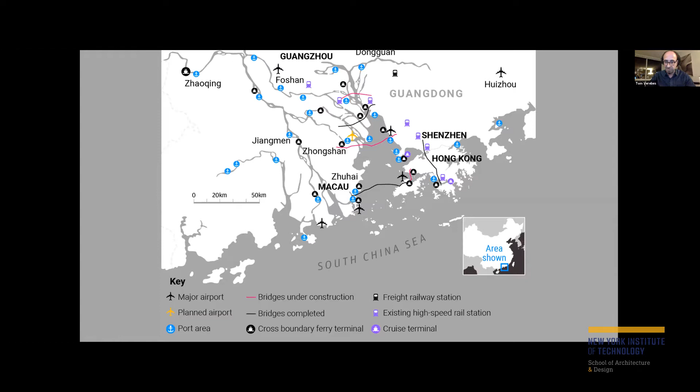Now the Greater Bay Area, it's difficult to put a number on it, but it's somewhere in the region of about 50 million, and all of the province plus Hong Kong and Macau are 120 million or so. The term 'city' is clearly outmoded due to its imprecision to describe these urban entities.

The population figures that you're reading on your screens are truly astronomical. The territories are vast. An important aside in this story is that in the year 1800, 220 years ago, Beijing was the largest city in the world with a population of 1 million.

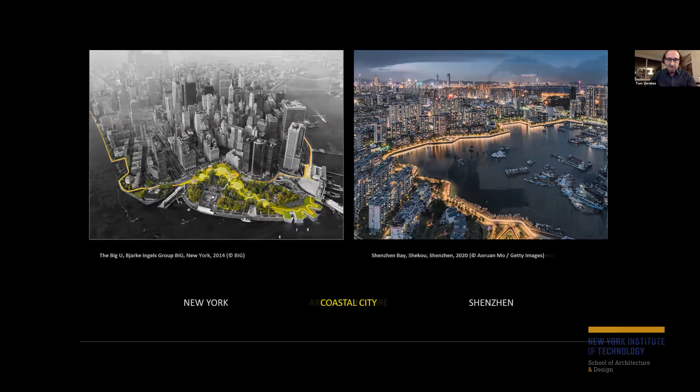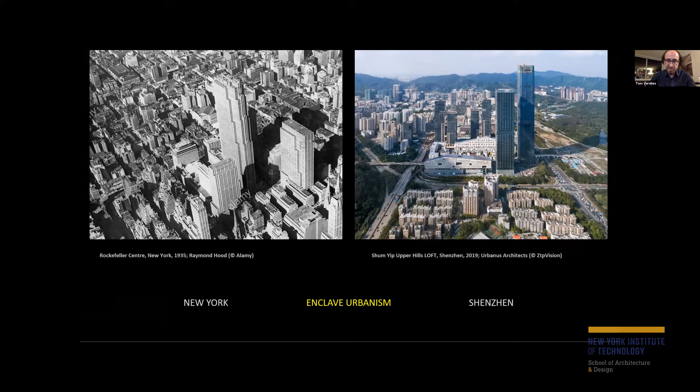So just very briefly, a little bit of the history of my work and practice on southern China, or in southern China.

We did an exhibition project for the Hong Kong Shenzhen Biennale in 2009 titled Parametric Pearl River Delta. We documented sets of urban and architectural information related to 11 cities in Guangdong Province, the 9 cities in the province and 2 others, the 11 cities that comprise now the Greater Bay Area. We coded a back-end computational model to be used in the front end on screen as an interface for visitors to design their own city.

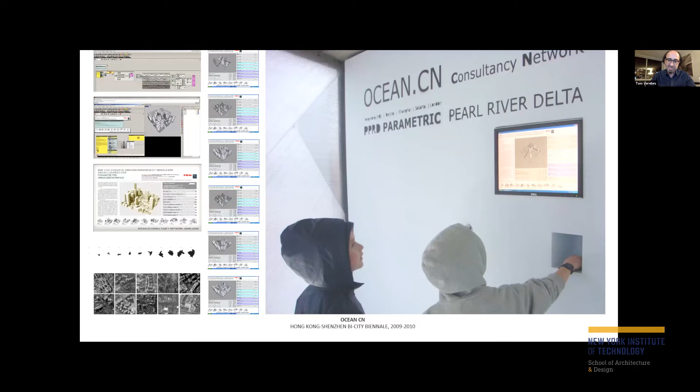That project and this one as well was worked on together with Gao Yan. This was our entry for an international competition for the terminus and passport ID control and customs for the Hong Kong side of the Hong Kong-Macao-Zhuhai Bridge, which the bridge is built, and the winning entry is also built for this landing point.

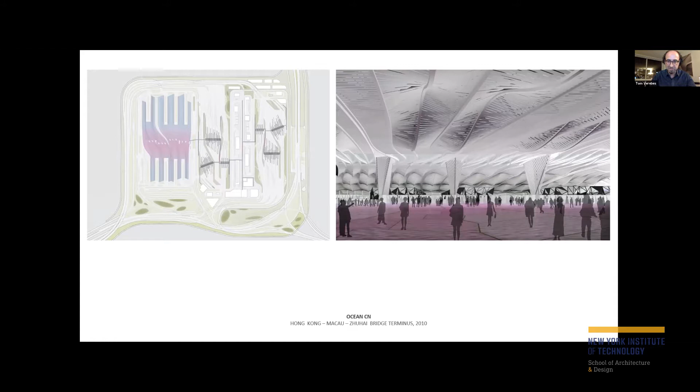In our proposal for the Liantang crossing between Hong Kong and Shenzhen, this is another border crossing, a land border rather than the bridge. We proposed to confront the dichotomous characteristics of the Hong Kong side being a green border and the Shenzhen side being built up as an urban edge. The scheme accommodates the criteria for a two-way flow of 175,000 people per day.

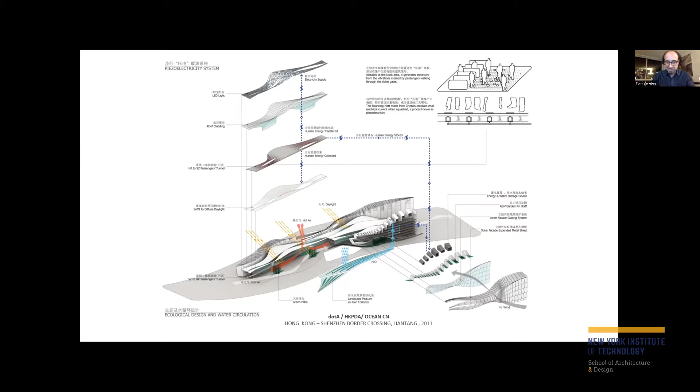A comprehensive energy scheme was developed. Footsteps of the mass of people, of the 175,000 people, would generate electricity. Rainwater collection was put in. Passive temperature control was embedded into the spatial organization and layers of performative materials.

Lastly, Hong Kong was my home for 11 years. The Seoul Biennale had invited my practice to contribute, and we produced a piece of research on Hong Kong using drone photography, video, and photogrammetry scanning. This is a model scanned of the Wah Fu Estate in Pok Fu Lam in Hong Kong. Thanks to our dean's support, it was exhibited also, this project and lots of its documentation in large format printing and video, in the Ed Hall Gallery in our Long Island campus before COVID hit.

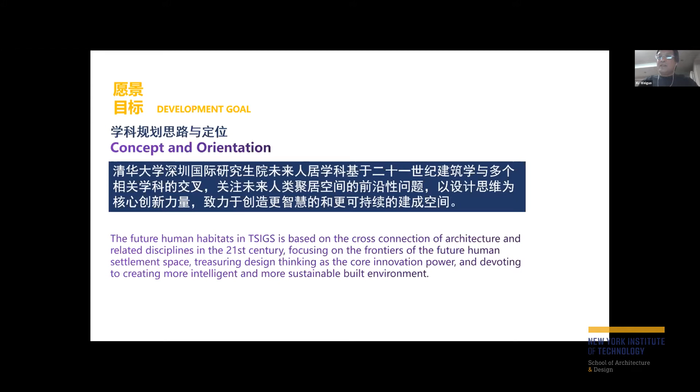Future human habitats in TSIGS will be built as a global think tank in the field, giving full play to Shenzhen's unique advantages of urban development practice, gathering the world's latest design thinking and human living concepts, and creating and propagating the most inspiring knowledge of human habitats.

I could say it has 3 basic characteristics. One of them is multidisciplinary integration and collaboration around the core of design thinking. Second, close integration with the major frontier issues of international and domestic human habitats development. Third, close integration with Shenzhen's representative development practice.

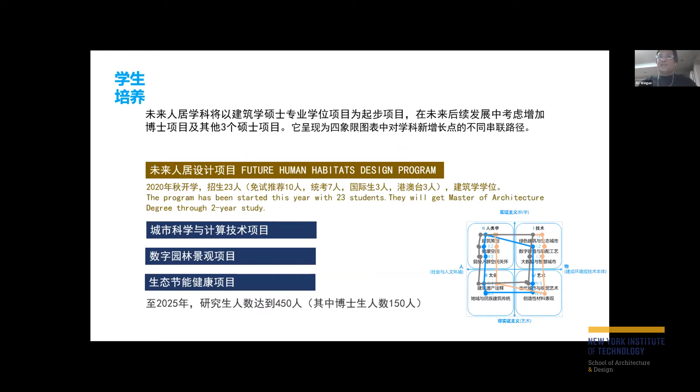The key research direction of the future human habitats discipline will emphasize the characteristics of cutting-edge, technical, future-oriented, multidisciplinary conjunction. There is 1 research center and 3 research areas in the institute.

The research center has been named the Global Innovation Center on Design Thinking for Future Habitats. The 3 research areas include future urban science and supporting technology system, research on digital architecture and intelligent construction, and the innovation center in technological humanities for human habitats.

I myself am in the area of research on digital architecture and intelligent construction. This research direction will be based on the deeper involvement of big data, 3D printing, and AI technology in the urban and architecture area.

The large-scale 3D printing technology of using composite materials such as wood and palm, and economic building materials such as concrete will be studied. And the digital city design, digital building design, and their evaluation methods and technologies will also be investigated based on data analysis, algorithm generation, and computational simulation, starting from the demands of future human habitat. It will also focus on establishment of scalable software and hardware platforms and updating of the corresponding architectural knowledge structure, providing new methods and tools for future urban planners, architects, builders, and managers.

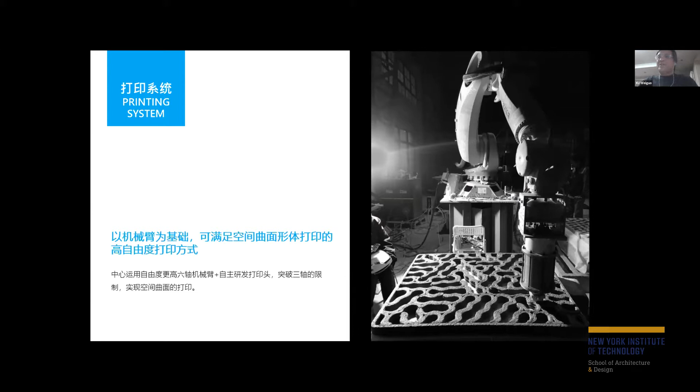First, we developed a printing system based on the robotic arm. Generally the printing system is a truss system, with 3 axes that could go X, Y, Z, but using the robotic arm, it could be printed in space.

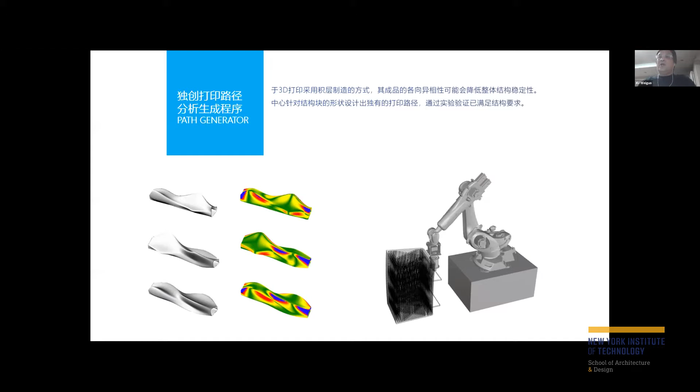Second, we developed a printing head which could continue long-time printing, and also developed printing material, concrete material - the material ratio is very important for the printing. We also developed a printing control system which combined a path generator and the control program of the robotic system.

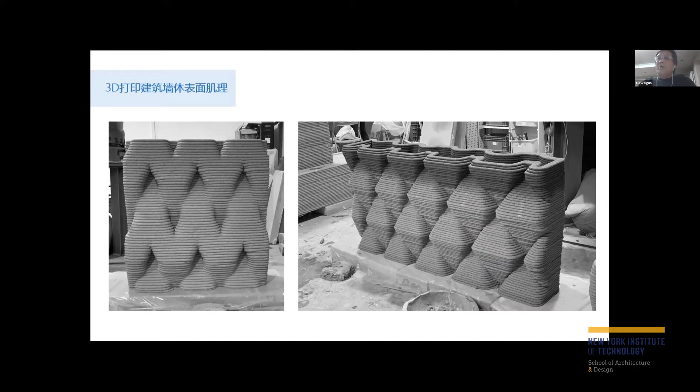After we set up this mechanical system, we did some testing printing. This is a piece of wall printing, and this is a big scale component of building printing. We also did color printing and printing texture of different patterns.

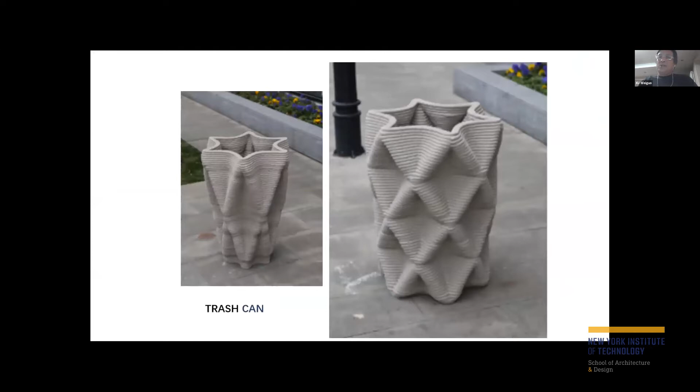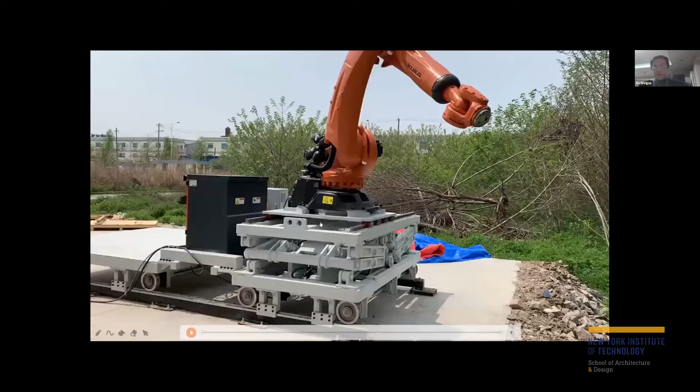In this project, we independently researched and developed 2 systems. One is a movable platform of robotic 3D printing in concrete, and the other is a rapid construction system for a concrete house. Recently, the 2 technology achievements have been successfully applied in the actual printing and construction of a model house for Kenya.

This model house is located in the experimental base of Tsinghua University in Wuxi. The screen shows the first system. Let's watch a short video.

The mobile platform contains a mobile robotic arm with a 3D printing device, a rail with a mobile lift platform, and a gantry suspending platform, among other components. In the 3D printing device, the robotic arm and printing front end are installed and designed to be movable on the lift platform. The printing material, the appending machine, the stirring and pumping all-in-one machine, and the control equipment are installed on the gantry suspending platform.

The printing platform requires only 2 persons operating it, reducing human input in the printing and construction process to a minimum. This printing platform enables direct on-site printing of all bases, walls, and roof, resulting in rapid construction at a low cost.

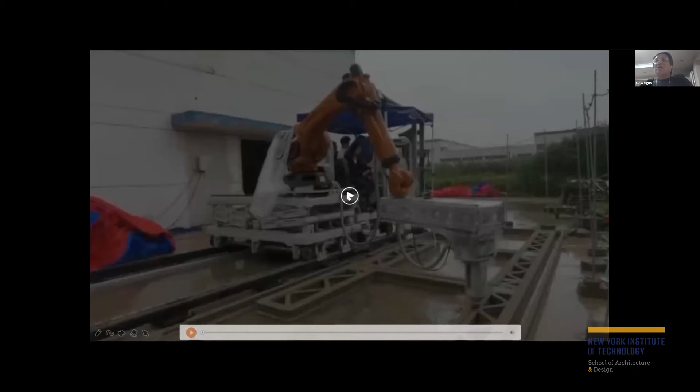After testing this mechanical system, we started printing the house - the model house. Let's see a video. This is the process of construction. The machine, the system, starts to print the base.

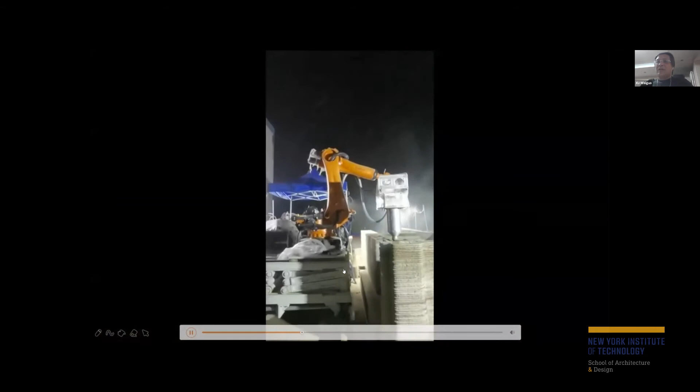The robotic arm, in fact, has 6 axes, and adding the rail and the platform, now it has 10 axes. The lift platform rises and prints the high part of the building.

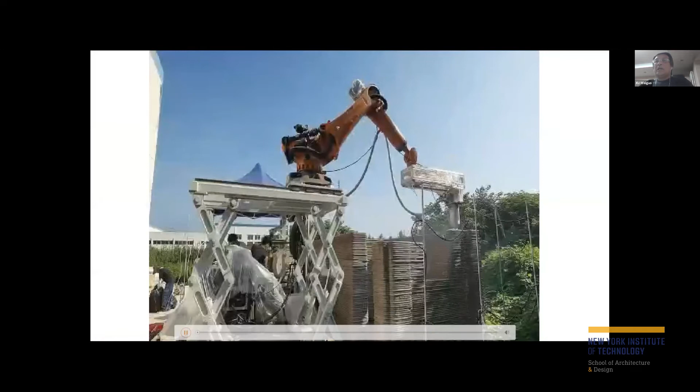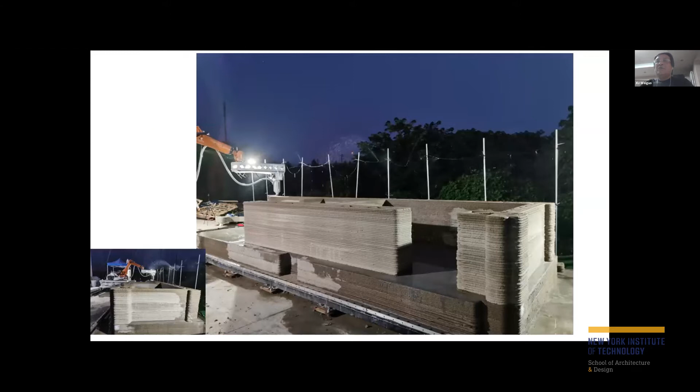Even at night, it could continue to print. This is a photo of night construction.

Another system is a rapid construction system for concrete houses. This is a 40 square meter family house for 2 to 4 people. This is the process of construction.

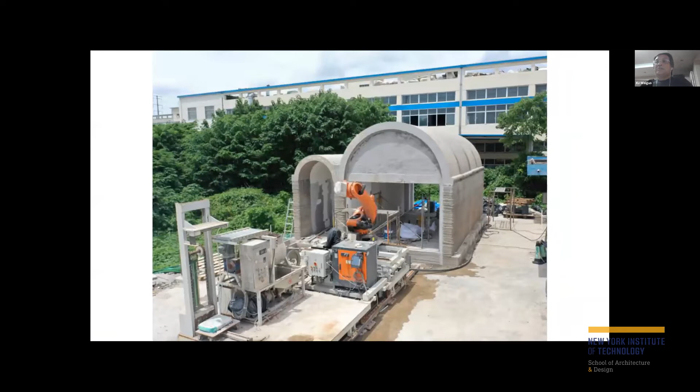You see the detail of the building. This is the completion photo, after completion. This is the interior of the building. Elevation, details. Let's see a short video for the house.

After this project, we get another chance printing a farmhouse. They call it Zhuan's house in the north part of China. This is the rendering of the house.

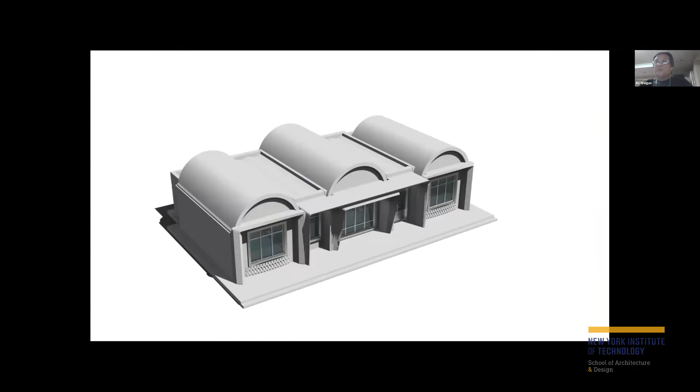This is the construction site. Now it's under construction, and 3 sets of mobile platforms are being used in the printing of the farmhouse, located right in the middle of the 3 larger bays. The base, walls, and roofs of the house are being printed on site simultaneously.

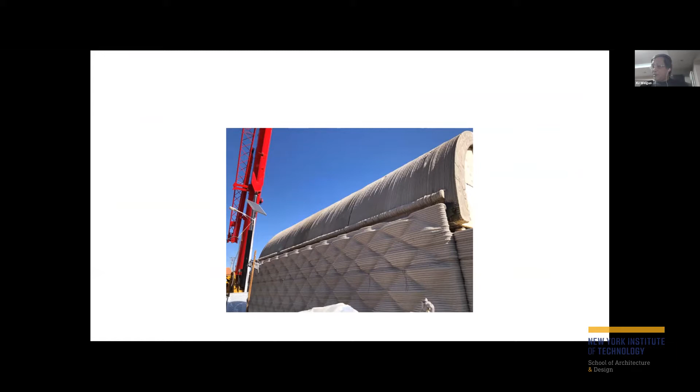The exterior walls adopted the traditional local woven texture as decoration, which was printed all together with the wall structure by the robotic equipment. The insulation material is poured into the gap within the wall, forming an integrative exterior wall system with decoration, structure, and insulation all in one. This is the detail of the printing of the wall.

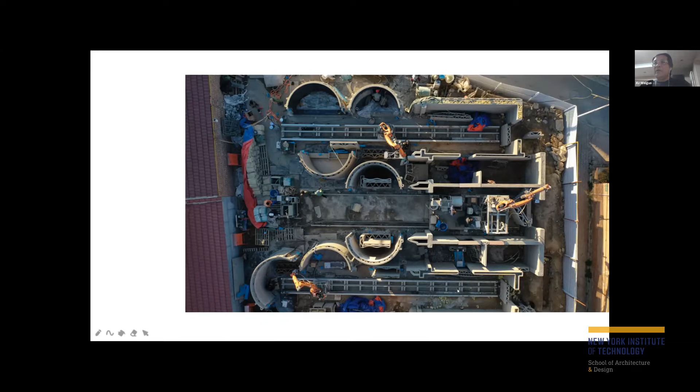This is an overview of the construction site. You can see it's 5 bays: 3 big bays and 2 smaller bays. The roof were printed aside rail—these are 3 rails. This is another angle of the overview of the construction site, and a detail of the construction site.

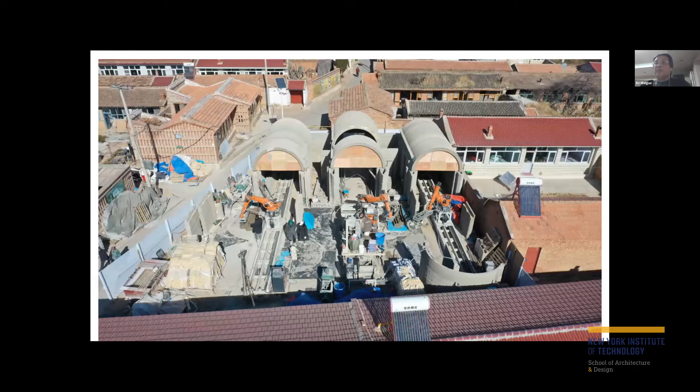Now it's almost near the completion of the house. Here's some detail of the building. This technology will be used in the Greater Bay Area and also other cities and countryside in China. That's all for my presentation. Thank you very much.

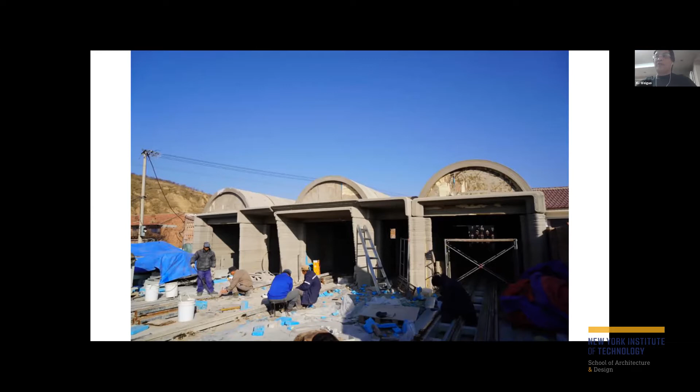Thank you very much, Professor Xu. Really fascinating to see how the technology is moving forward in one-to-one.

Our next presentation is from David Graham Shane, who's adjunct professor in urban design at the Graduate School of Architecture, Planning and Preservation at Columbia University. He'll present his presentation titled 'Great Bay Public Space, A Century of Continuity and Change in the Pearl River Delta, 1920 to 2020.'

Graham, I hope you can see my screen. Yeah, can you see the screen? Not yet. Let me see—I pressed the share button. Hold on. Share screen. Yes, can you see it now?

Yeah, okay, so I have a very short—first of all, thank you, Tom and Dean Maria, for inviting me. It's fantastic to be in such distinguished company and looking at this amazing city complex, something that I call the meta city, as well as being a mega city.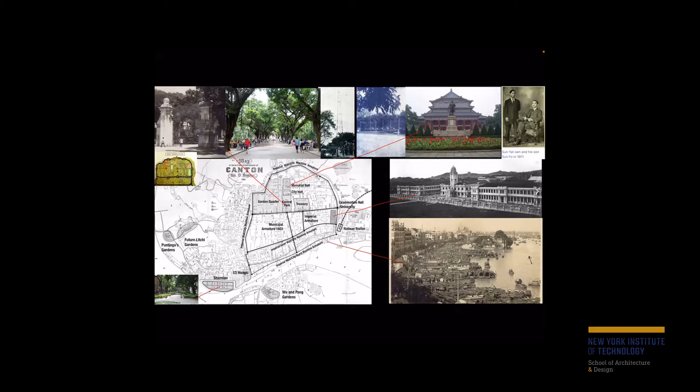So I'm jumping because of time - I'm skipping out the whole Mao period. I'm missing Abercrombie's plan for Hong Kong, and jumping to the 60 million era.

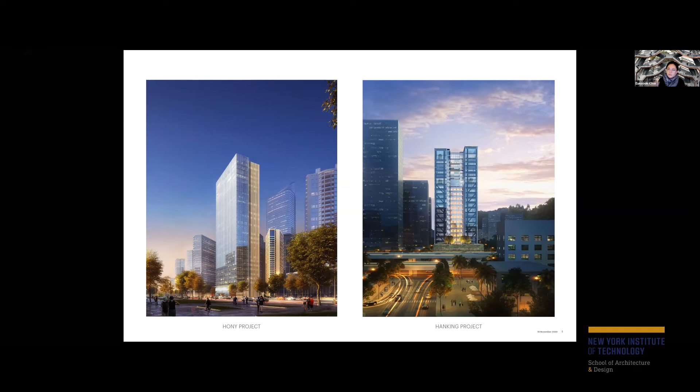they share one common thing, which is they want to have a residential program. When we got these two projects, we asked why, because it's very unusual to have this office program together like this. The Hony project is right in the central business district of this newly developed district, versus the other one which is really at the edge of this new district, facing shipyard containers. There's nothing there.

So it's really interesting, because on both projects the city officials have a high demand on developers to accommodate a certain number of residential units in order to relieve pressure on housing prices and living conditions. At the same time, owners are very willing to take that opportunity. For the Hony case, they want to attract young qualified laborers from neighboring cities like Hong Kong, drawing highly educated people to their companies. Versus this other area, they want temporary accommodation to address the demand of visitors or workers who need to be there, because this is a newly developed area with nothing to accommodate their needs for living, shopping, or working.

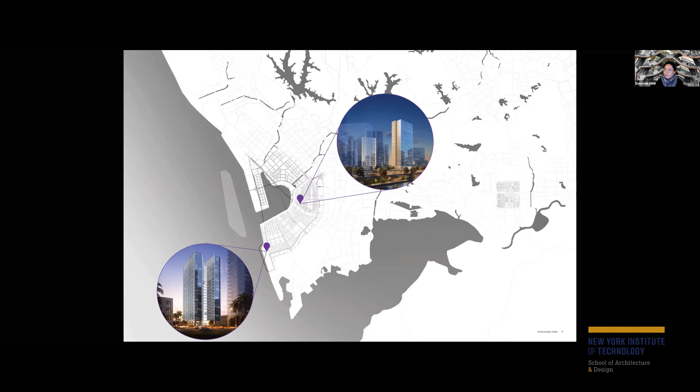So it's two different reasons they had this program, and two different site conditions we tried to solve together. We're not perfect, we couldn't solve everything, but it was a very interesting way to see how Shenzhen is actually forming and addressing those kinds of demands and challenges.

So these are the two projects. As I mentioned, Hony is located very much like a central Shanghai area, with two site blocks facing the river, and some of this green strip we talked about before, which acts more like a green park. Mainly this is all an office district area.

Versus Hanking, which is located near the Bay Area, at the edge of this new development area. Most of this area is a shipment area where tons of containers just pile up with nothing there. There's also a power station, so there's nothing really attracting this whole area.

As I mentioned, this program demands residential space and what we call a dormitory, because this is temporary housing. Because the Hanking project is relatively small, it demands more parking space since there's no public transportation supporting that area. So we just put this together as one building.

Versus the other side, we have two blocks with a much larger program requirement for residential, so we extracted all the residential program as one building. So we have two completely separated spaces, two towers.

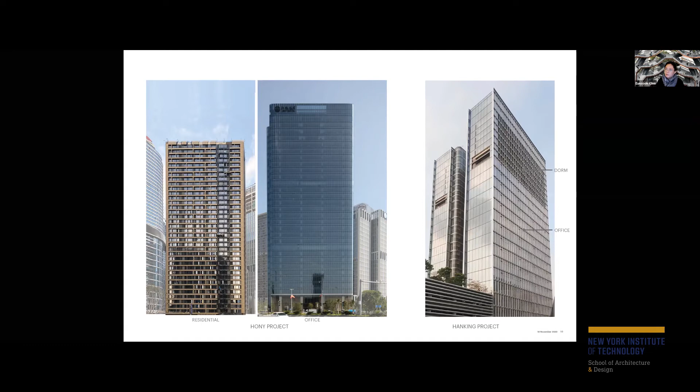So the Hony case, as you can see from these two towers, faces the major river on the south side, and the north side has a major city center, which is going to be the business district.

One of the biggest challenges we had at the beginning is that the subway runs right below our site. So even though the north side of the block is much bigger, we cannot really use most of the land because of this subway. Originally, the district master plan showed this one as an office tower, with a smaller residential/office mixed space. But we suggested reversing it, so the office tower faces south where they can have a bigger, more usable land area, and the north side has smaller towers with a residential-focused program.

What's good about here is that this gives a lot more free land, so we can create more pocket gardens and green surfaces like a plaza, which can accommodate much of the residential need as well as a sense of placement.

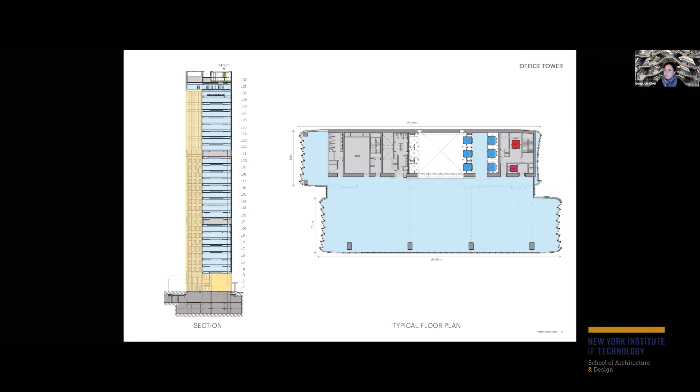Shenzhen is known for being a good windy city, so we could have very nice natural ventilation through this atrium space.

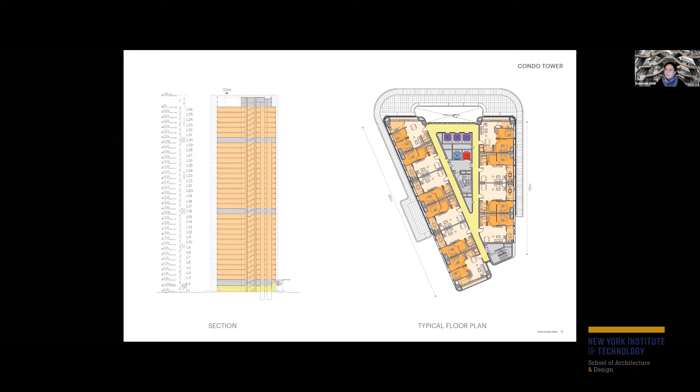The residential building has a similar gesture, mimicking the atrium space, but rather than an atrium space, it's more open toward the outside. So while people are waiting outside the elevator, they can view outside and feel the space. This is the view from the residential tower.

One thing we try to do is use a similar material palette between the residential and office tower. So when looking from the residential tower, they share the same yellowish granite stone, which isn't usually used for office towers, but that creates a sense of solidity as well as contrast with the atrium space versus the core area, creating almost a family kind of language, sharing this green plaza in between the spaces.

This is the residential facade. Instead, we try to have just regular punching windows. Although it's more like a punching window, we're creating patterns using different material color palettes, creating an illusion of randomness in the facade.

The entrance lobby has a very nice stone canopy, and the stone floor comes from the ground, as if the whole tower is growing out of this floor, creating that solidity. Then the office tower, as I mentioned, has a mixture of glass and stone.

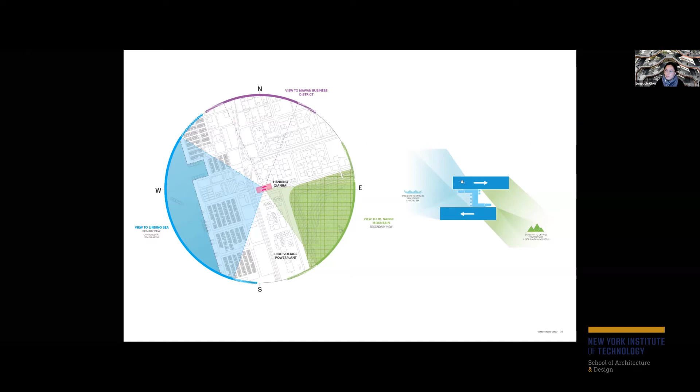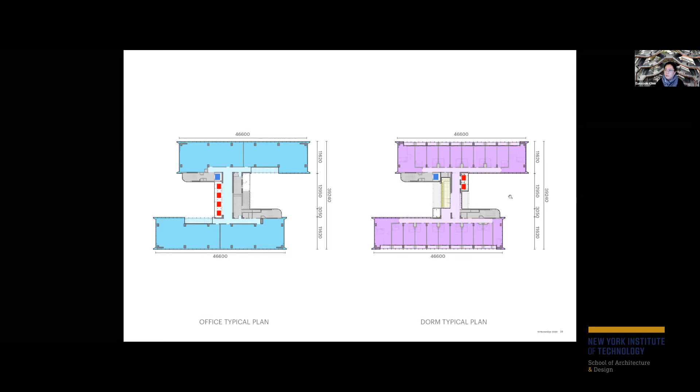As you can see, each bar can divide into two spec offices. On top, using exactly the same depths, we can address nice individual dorm rooms with small balconies so they can have some nice outdoor spaces. In section, we have in the middle sectionally divided these two programs.

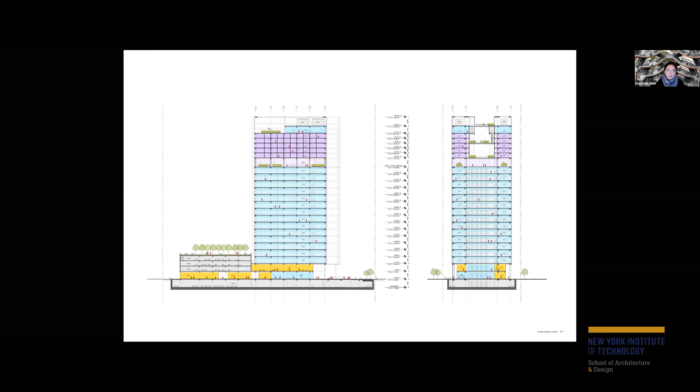We have a sky garden that can be used publicly, addressing some of this public need. Retail and amenities are on the ground and second floor, and we have a parking space with one floor of parking below.

So our goal was to address the same module and same facade system, but when turning into the residential program, we start to build up these balconies, creating this facade with more depth, creating a more interesting texture. But it doesn't kill the sense that it's the same building.

It looks like the same building, but with a different layer and depth of texture, creating a more interesting outlook. And then at the bottom of the garage, we try to have this kind of green wall facade.

The exterior wall responds to the neighboring areas, which have very industrial surfaces - it's an industrial neighborhood. So we try to use a cooler color palette, like black and gray stones versus metals, with a little accent of wood texture, like a metal panel for the soffit.

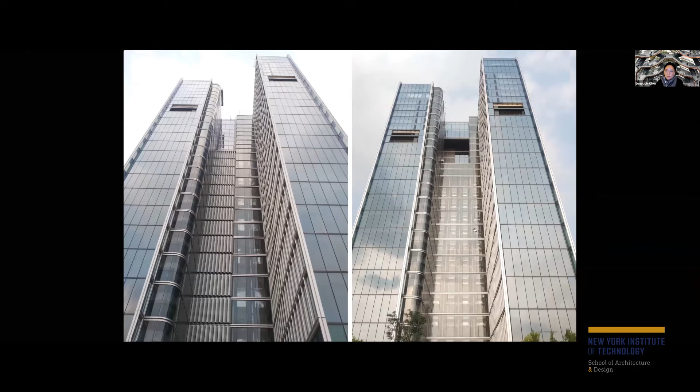The two elevator lobbies for the office and residential tower each have their own character. For the interior, same as the other project, we try to use warmer, more textural, natural materials to create more cozy, human-feeling spaces.

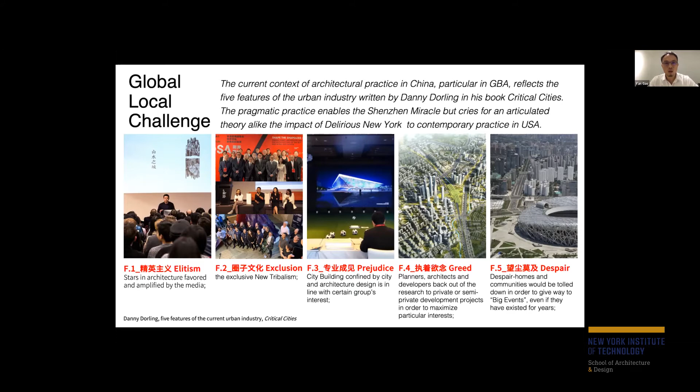So look at the first point, which is elitism. I'm really interested in the people who actually make the city, live in the city, producing, designing the future of the city. And apparently, the media contributes to the elitism, where the younger generations begin to look at the heroes. They listen to them. They have the power of wording and impact to the decision makers and also the future talents.

And therefore, the media, of course, also brings the widening of the horizon of the decision makers in the region, not only for government but also developers apparently, and they actually attract probably the most famous architects they can name in the world to pitch for projects in this region. For government-funded projects apparently, having star architects on board will be also a certain degree of guarantee, for many reasons.

However, through collaboration with Bernard Tschumi, I realized there's also a struggle for the landed architects when the context is rather complex for him to grasp, although his practice series methodology is heavily based on understanding of the context. And with that vacuum from this project, I can see his struggle, and he had to somehow take the legacy of his very early work, the Parc de la Villette.

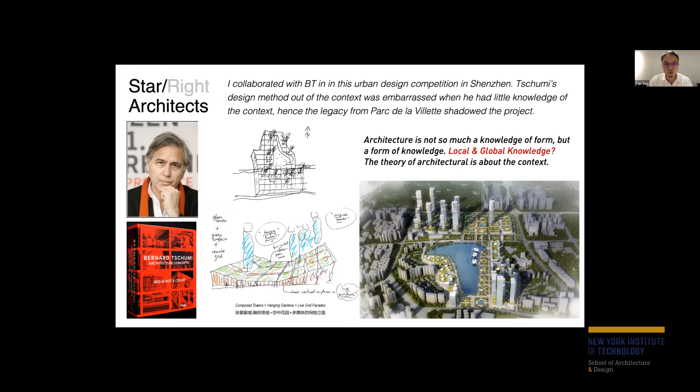So the local and global knowledge and really the theory about the context is a foundation for pragmatic practice, and it also reflects, I guess, many truths when foreign architects engage with the area. And the phenomenon of choosing architects also changed when this project was very recently awarded to a local small studio by Zhang Zhiyang, who graduated from Harvard. He opened his office nearly, I guess, 15 years ago in Shenzhen, a small scale practice, but he won this big scale project competing against many other big names.

So there's a sense that the government is more practical, looking rather than at star architects, but at the right architects. And this moment for us is quite encouraging.

The second feature is exclusion. We all live in society where we belong to certain groups, and there's always a scope, a boundary of a particular group, either academic, professional, dear friends, family, from different backgrounds. But it's like the new tribalism, and we're living different tribalism, and there's a theory that the more diverse or the more multiple tribes that you sit with yourself, the more likely you'll become resourceful and achieve what you aim for.

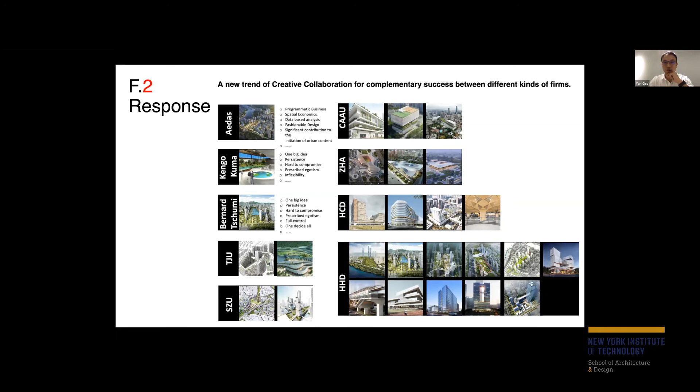Not only working with or collaborating with other architects, which becomes a very interesting phenomena - every time you see a big competition in Shenzhen, you always see joint ventures. We all know architects inherently like to work on their own, but the current projects in Shenzhen, particularly with the demand of high-profile track record internationally, as well as local insight and contact, actually formulate many such global and local collaborations.

In addition to disciplinary collaboration, we also work closely with operators, with the runners, with stakeholders. Like in this project, it's a primary school project where you see the lady - she is a director of the school.

That project is actually also an experiment for me to integrate education from the iMarch Studio at HKU into a real project, where the director wasn't happy with the under-construction project and began to think about how to transform it before it was completed, designed by another LDI. So we were on board and did research because she complained about the lack of space, and also wanted to conduct a very different pedagogical methodology.

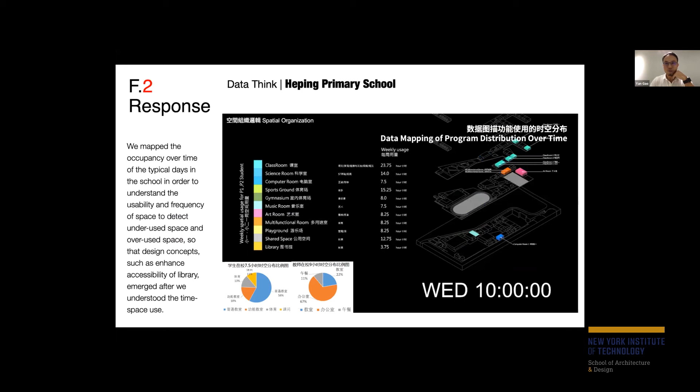So we mapped it. We began to see how the space is activated during the day, and through that analysis we were able to understand the frequency and occupancy of certain spaces. The goal became how we can equalize the occupancy of the space so we don't waste a certain space during a certain period of time. In doing so, we realized the school is actually pretty big.

Another important discovery of this project is we realized certain areas had the potential to become a hub of interaction between teachers and students. Through the research we came up with an idea for how to create an open plan for the teacher's office, which used to be cells where teachers worked behind closed doors, burying their heads on desks working on papers. In this project, we tried to encourage more interaction between teachers and students, and also amongst the teachers.

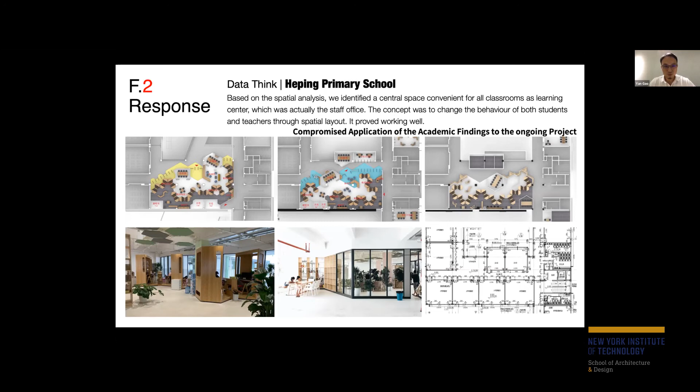So the demolition of a certain classroom in the hub area, where everyone would likely come across through multiple corridors and staircases, allowed this cellular, furniture-based, semi-enclosed space to occupy the central open area. The result turned out quite surprisingly good, as it really changed the behavior of the teachers as well as the students.

The students were more willing to speak to the teacher, and the teacher also became more aware of their own behavior, being visible to other teachers and students. So to me it's a quite successful experiment to see how design, through a very small scale, can have a positive impact on people's behavior.

In addition to engagement with stakeholders, I also actively work with industry, because we all know this area is called the Factory, the word factory. There's an enormous power of production, making, and manufacture, and there's also an increasing demand for architectural application in rural areas. So we understand urbanization as part of a larger integration of urban and rural.

This product idea really takes modular intelligence and looks at a building that doesn't need any foundation - it carries its own foundation. So you can easily build and remove it. The whole structure can be built within 2 or 3 days, and the whole interior, including the interior fit-out, can be finished within 10 days. That can satisfy a huge demand from different suburban areas.

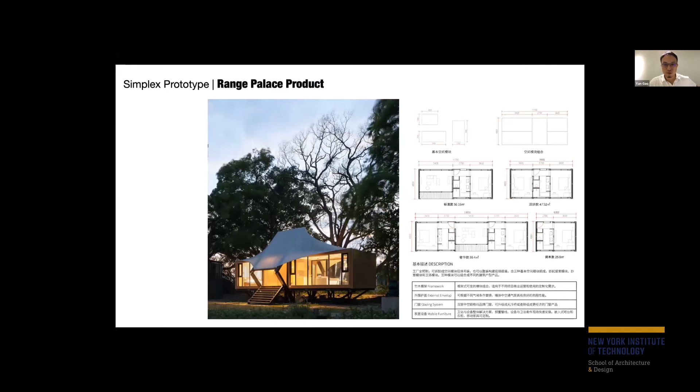The modular composition can become different sizes for different programs, not only residential but also other potential programs such as retail. And there's a lot of knowledge and research behind this.

In this project, we use a 5-axis CNC machine to build the multi-tenon joint, because we really wanted the timber module to have this free-of-cold bridge, so the comfort is better, and the assembly of the box has a more robust structural resistance to unpredictable forces during shipment and construction, where they literally build and crane smaller modules and combine them on site.

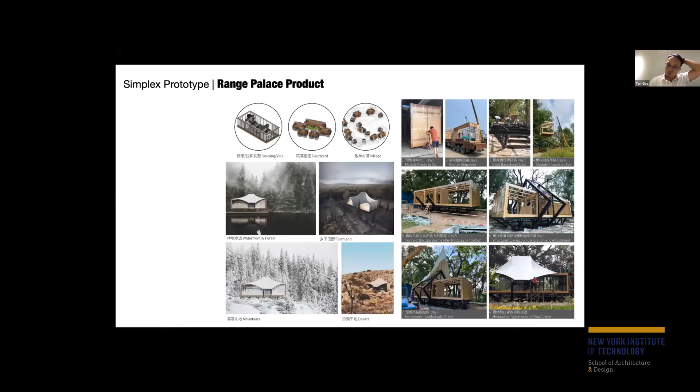And happily, we see another project after that residential one, which is another seafront area they use as retail small buildings. This idea of this prototype continued to develop into other programs.

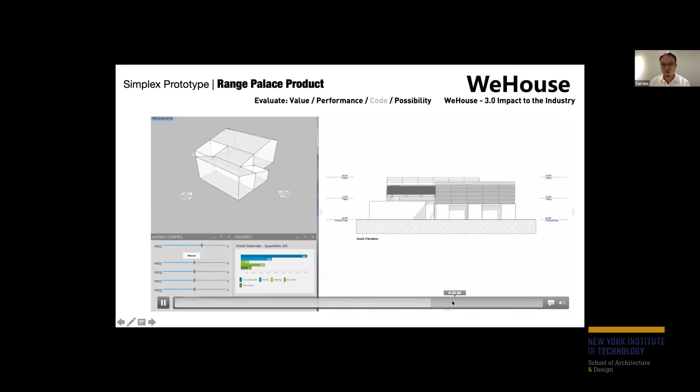The idea really, we try to see how we potentially have this parametric kind of digital model where we control a BIM model, and then that information feeds into the manufacturer, the digital manufacturer, to achieve this mass customization agenda. Generally, we have this abstract model controlled by the architects, and then the quantities get this real-time output, and then even hand over or transmit to the BIM model, which will produce the as-built information for the manufacturer. So this is a general kind of research area that I'm looking into, taking advantage of the manufacturing of this Pearl River Delta region.

And I need to speed up in the interest of time. So the third feature, which I call it...

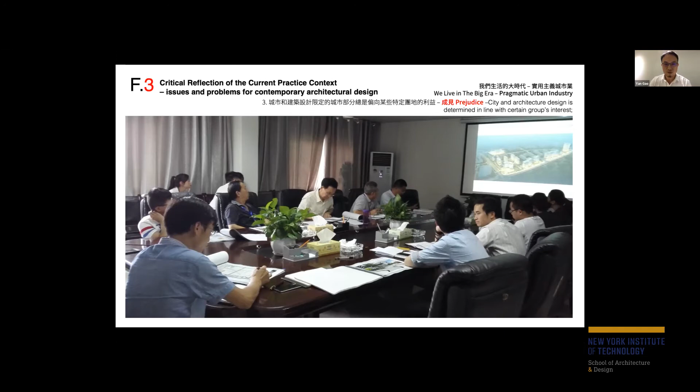Prejudice. We all know that many projects are decided by a minority of people, including expertise, governors, founders. So they made the city, particularly those iconic projects. Like, maybe you heard about the 10 grand cultural icons in Shenzhen, they all came out this year, through endless competitions and juries from all over the world and in China as well. And this project, being there for many years, by Coop Himmelb(l)au, was apparently decided by a certain group of people.

But my argument about this project, although it is a great architecture in many ways, however, if you look at this photo, what it shows is this fence which prevents people from coming up to use the space. It was initially designed as a fairly accessible public animated space, however, it became an empty hall, and people just take photos.

And then the corner has a small exhibition for certain fine art. So the problem is there's a severe lack of content, the curation. People build a lot, but then try to fit in stuff afterwards, and it suffers from this empty space for years. Although it's getting better, you can imagine, with 10 icons, some larger than this project, taking place simultaneously in the coming years in Shenzhen, what's going to happen, what are the opportunities, and where should the resources go.

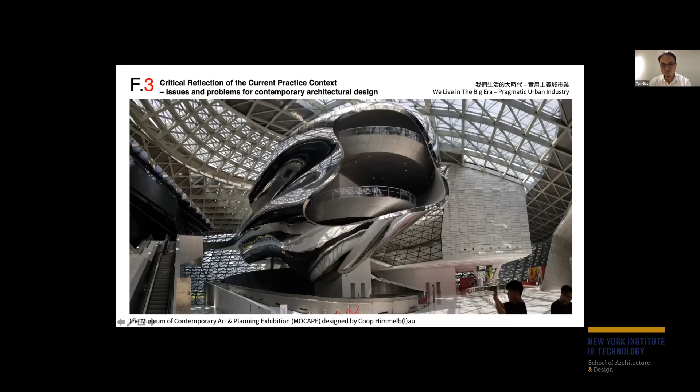So in response to this feature, I'll quickly browse through this project, which is a recent winning competition by my practice in collaboration with another local office. It is a cultural icon, including a library and also a youth center, which has many artistic training programs and classrooms, after-school training education.

This project, we spent 2 years before helping the government to really articulate and develop the brief. Our research started from the survey, the investigation with the local community, really understanding who comes here to do what, and we found that average people spend nearly a couple of hours in the library, sometimes up to 4 hours - it's a really demanded public facility. Many people use it not just to read a book, but also to do other learning activities.

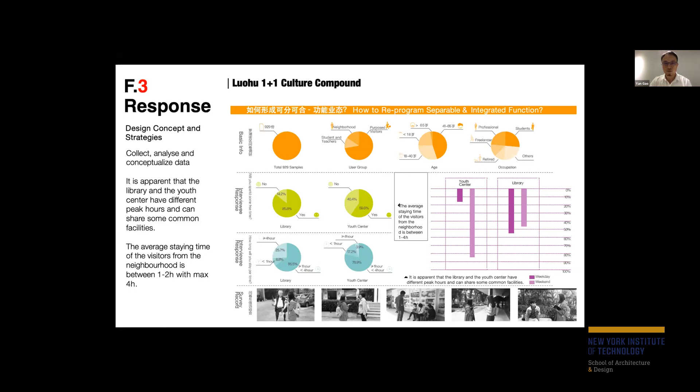Whereas the youth center is used in a different pattern, there's an opportunity for them to share some common amenities because people use the time differently. So that knowledge continues to grow - it's a rather complex combination of different programs, and we begin to analyze and understand there is some thematic relevance between the two organizations. They run independently, but for users, their experience might benefit from shared space and programs when participating in different events.

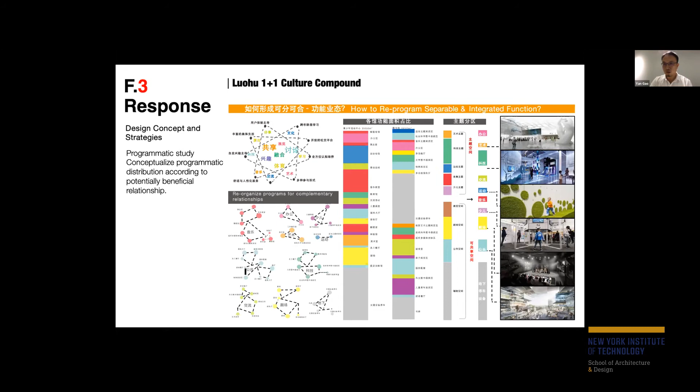So you can see that engagement of the users with the community helps us develop the project, which then starts from the content operation to inform the building eventually.

The second to last feature, which is greed, basically describes the commitment to maximize the capital investment or political interest. When we look at new developments, there's always a pursuit of GFA or density, FAR, the value of the land. But it really depends on how we understand value, and now the understanding of value is changing.

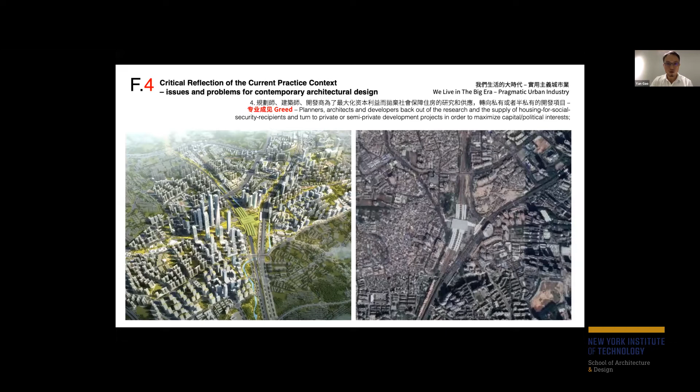So when we were employed for this project in Guangzhou, an office building developed by Vanke, they wanted to create a new type of office, more like a community for creative industry in that new urban area. It's like a tabula rasa, increasingly built around it.

So we initiated a concept from research of more than 100 creative parks worldwide, and tried to theorize why the warehouse type of office attracts creative industry the most, and concluded with the low-rise experience and the importance of the street, the communal space after their cellular office.

So how to create a high-density environment like that became really the driving power of the project. We have a design process, which I cannot go into details, but just to show our way of practice to not only stop at the completion of the project, but continue to trace the project to see how it operates, and then feedback to our design knowledge.

The building went beyond our expectation, but what we expected is a way that people use the space more like a warehouse way, because we have this idea of more like a stacking factory, and you can see how it works. We split the cores and opened up the solid central area to create this central void, which is good for the office, has the dual aspect, and also the ventilation as well as interaction.

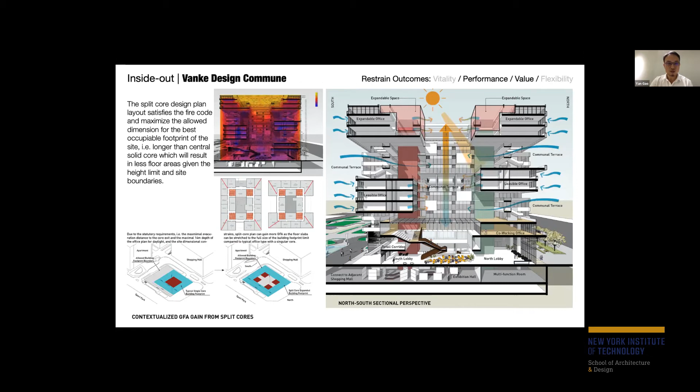And those terraces become the emerging space where the office can expand their activities. And also the plan, the dimension is designed in such a way that they can flexibly use the space, creating an environment like they have for the low-rise warehouse, as well as some reserved space for office expansion at the very top, and this proves it really works.

So that's also the value that we achieve through the intellectual thinking of the architecture in a different way.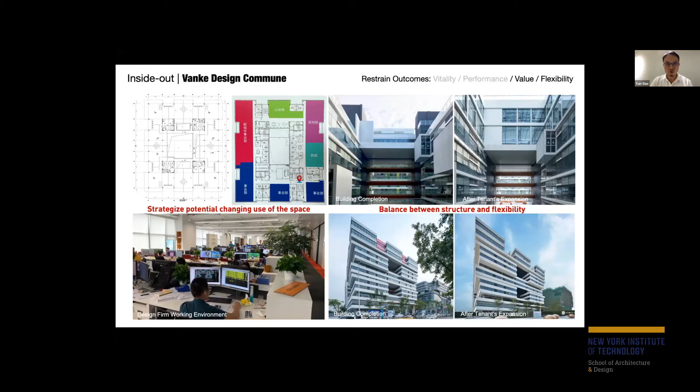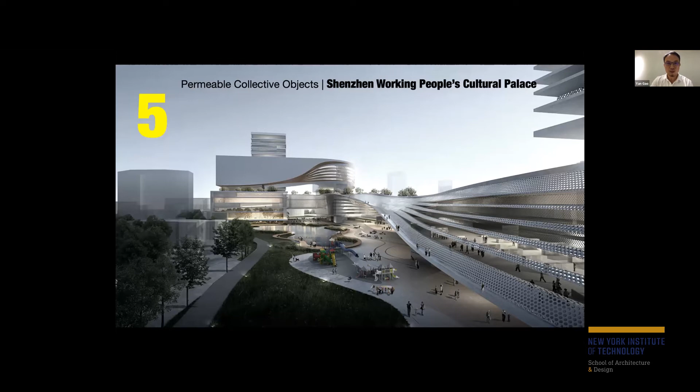Like in this project, it's situated in the center of Shenzhen, the first developed area, and there's a lot of memories. We worked with a curator of a museum who grew up in Shenzhen, to really dig out those buildings and spaces that construct the memory of the city, and we see how the building creates a platform where we can see those buildings, as well as respect those surroundings in terms of circulation, so it becomes really a permeable collection of a number of small buildings, but together it also needs to become a certain icon to satisfy the political goal.

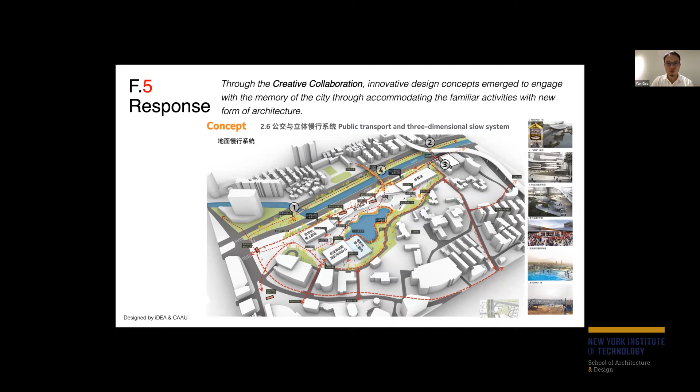So to summarize my presentation, I think from this emerging pragmatic practice, how do we then have the theory to lead to more creative and critical pragmatic practice. This is what my PhD research is doing at the moment - to really look at Chinese modernity, understanding that process as a dynamic, flexible methodology that deals with different subjects, and that will construct a more coherent set of knowledge, enabling professionals and scholars to bridge the gap between scholars and professionals in this very complex practice environment in China.

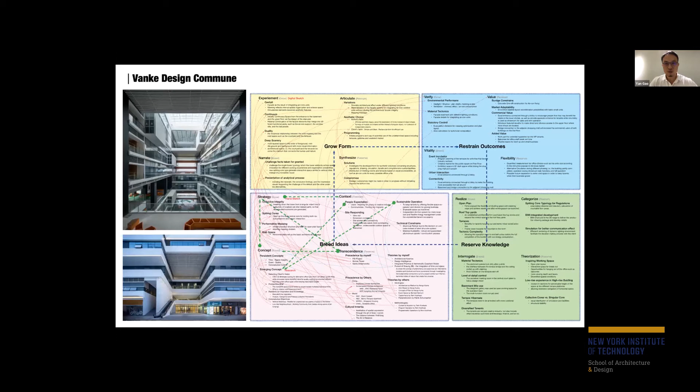Such as the Vanke Design Commune, where I just showed that project, and those are the points which I trace back to see how the decision was made. It's really non-linear, complex - there's a lot of tacit knowledge behind the pragmatic practice, which I'm working on. So thank you very much.

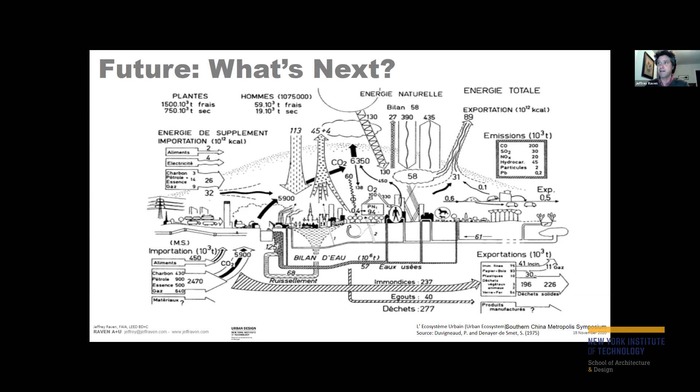And during the course of that project, we were able to collaborate with a number of universities in Hong Kong, Beijing, Xiamen, and Shanghai as well. So it's been absolutely amazing to have the chance to get to know some aspects of this country.

Want to talk about the sort of complex challenge of the 21st century, how cities basically are confronting this. The Greater Bay Area megacity cluster is confronting 3 main challenges: one is climate change, the other is the kind of urbanization that is putting enormous strain on urban centers, and issues around equity.

There's a paradox between high density cities in the GBA and the kind of poor local climates that result from this high degree of densification. The urban design decisions we're making today will have huge consequences on our climate for generations. As we know through experience, poorly designed, dense urban environments can produce poor local climates.

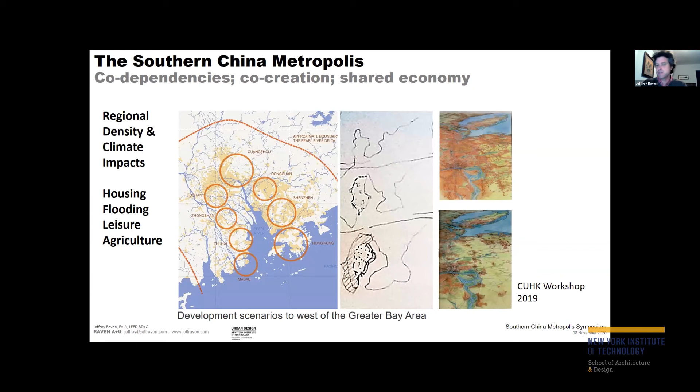I did a quick sketch when I was in Hong Kong on scenarios for the western part of the Pearl River Delta. There's an area that is particularly flood prone, that hasn't been highly developed at this point, but perhaps it's an opportunity to set aside some of those zones for potential agriculture or leisure activities, and just to be a kind of lung, if you will, for the overall region.

As part of the current and future expansion, the Chinese government is identifying different zones for future development, and this happens to be one that's actually on the eastern part of the Greater Bay Area, called the Eastern Gateway. It's the zone of Shenshan, connected to Shenzhen Futian in under an hour by high-speed rail. This is sited beyond the current periphery of the urban sprawl of the megacity, so comparatively underdeveloped for the region.

This area is a key future node for the shoreline of Guangdong Province, where new development is now required to protect and promote existing natural resources, including beaches, islands, rivers, and these natural features. Ultimately, and interestingly, the municipal government is envisioning this particular region, Shenshan, evolving into a sort of coastal smart city for housing and business, as well as a global destination for ecotourism.

So our urban design studio last year engaged in Shenshan. We actually went to China, to the region, and also to Shanghai, and we saw this as a laboratory. The students introduced ideas and techniques of contemporary urban design through the lens of a resilient and sustainable built environment.

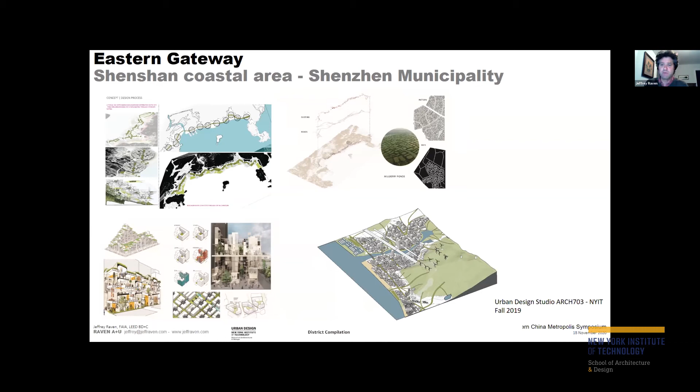So what were the components of this approach? Just as our last presentation talked about a methodology, a process, this one also, we're very keen to develop a methodology in terms of climate adaptation and climate mitigation in our dense urban environments. It's comprised of urban function and urban form, with 4 key pillars: one is the efficiency of urban systems, the second is form and layout of the district, and the third is the materials—our first presentation talked about the potential for concrete and thermal mass, perhaps.

And then fourth is vegetative cover. As the Greater Bay Area megacity cluster is completing its first phase of mass urbanization, linked by 21st century transportation networks, it's maybe a critical moment to study and question the effects of rapid development and analyze the kind of urban systems and processes. Perhaps it's an opportunity to propose a new vision for a contemporary eco-city.

This is a diagram by a colleague of mine, James Lee out of Shanghai, looking beyond transit-oriented development into transit synergized development, where compact TOD is powered by shared district energy, microgrids, and density encourages the reuse and recycling of district energy and waste. So it's a great opportunity for energy transfer between different hubs and different users within the overall hub.

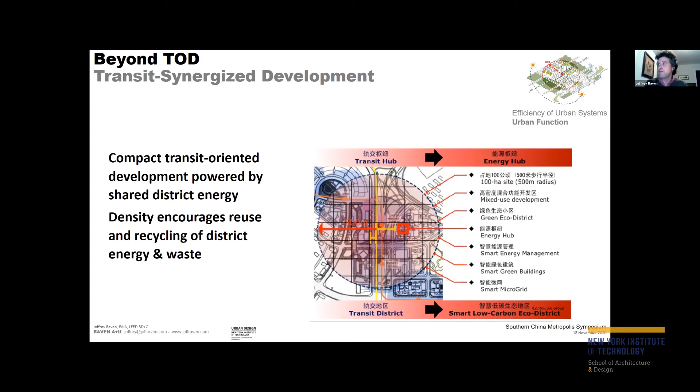Now I have a series of questions that I've asked myself during the course of my travels to China, also stimulated by our discussion tonight. Is there an emerging Chinese model for megacity development that's different from other megacities? Should there be one, or are megacities less about national traits than relationship to climate, demographics, and economic sectors? If you were to fly over a Chinese megacity, would we be able to recognize it as different from other types of megacities?

Another question I would pose for myself is new cities versus retrofitting existing cities. And of course, this is an ancient part of China, as Graham Shane showed. While much of the urban development over the next 30 years will be occurring in new and emerging megacities, how do we actually retrofit existing cities within this mega region so that they transition to a low carbon, ecologically balanced lifestyle?

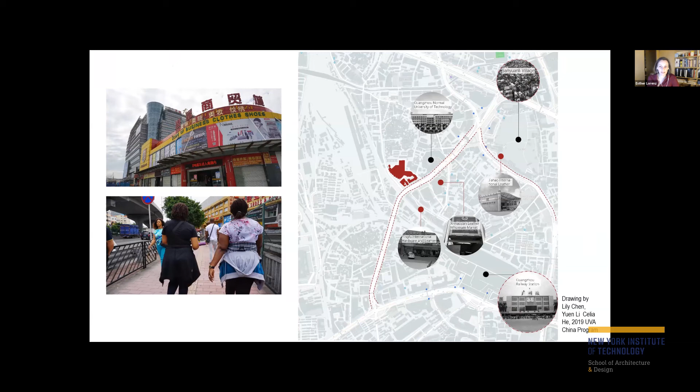The Beauty Exchange Center is part of a linear cluster of wholesale centers along Guangyuan West Road in Sanyuanli. The area is a prime destination for African traders. There are restaurants offering African food, and some shops are owned by Africans.

The second place, Yidong Building, is a 14-story building located right at the exit of Xiaobei Metro Station. Floors 4 to 13 are home to 89 companies, 45 of which are international trading and logistics companies specialized in African and Middle Eastern trade.

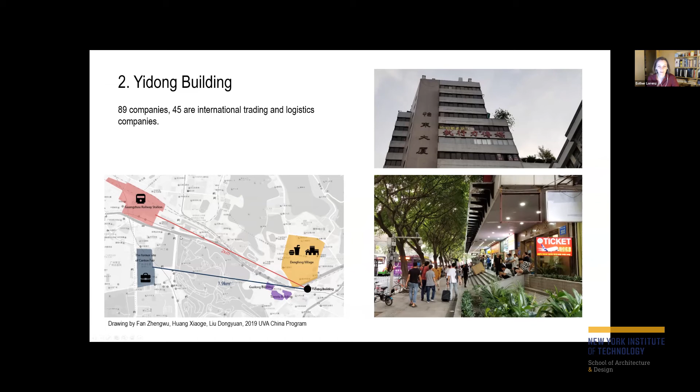The first 3 floors are retail, mostly for clothing and electronics, as well as cafes and restaurants, a prayer room, and services such as travel agents, visa consulting, and money exchange. The building aggregates all services and support that an African or Middle Eastern trader needs to do business in Guangzhou.

Rather inconspicuous and small looking from the outside, it unfolds and seemingly expands as one enters. From dealing with shipping logistics, getting internet connection and buying a phone, to exchanging money, booking an air ticket and buying gifts for the family, to having a good meal and a coffee. Yidong Building in Xiaobei is a real bottom-up CBD, serving the trading operations in Sanyuanli and Xiaobei.

The third place, Dengfeng Village in Xiaobei, offers an array of restaurants, African, Middle Eastern, and Chinese, cafes, bars, a fresh food market, beauty services, as well as retail, a hotel, and a couple of smaller wholesale centers. The village brings together diverse groups of African populations, Francophone and Anglophone, Christian and Muslim.

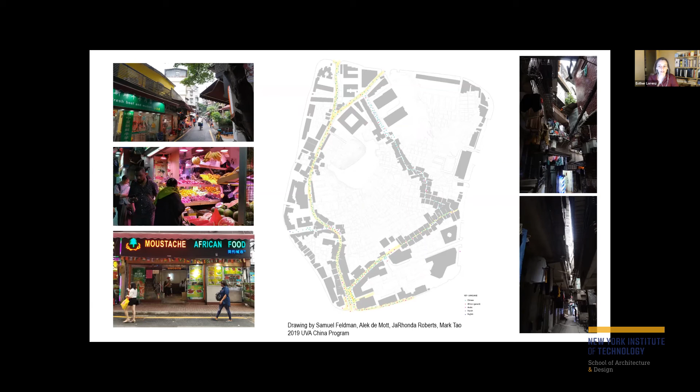Uyghurs from Xinjiang are working as taxi drivers in the area, and the Hui from Qinghai mostly hold money exchange businesses in Xiaobei. The 2 main streets are lined with retail, dining, and services catering to the needs of these diverse populations, while the village core with the narrow alleyways remains a territory uniquely occupied by Chinese residents. Here we see Hui women and their children entering the village.

The plaza at the entrance of the village on arrival from Xiaobei station is a busy meeting place in the evening hours. Here's a shop selling SIM cards, phones, and freshly pressed fruit juice at the plaza, a view onto the reception in the lobby of Dengfeng Hotel, and a shop selling clothes in the Honghui International Trading Mall.

Here we see Baohan Straight Street during the day with restaurants, a fresh market, and communication services. Nanyue Straight Street seen here in the evening hours when Xiaobei is bustling with life, attracting traders after work for dining, entertainment, and purchasing gifts.

Religion plays an important role for many African traders in Guangzhou, and the possibility of practicing their faith is crucial in supporting and extending stays or even getting settled for good.

Xianxian Mosque, which is frequented by traders of Muslim faith, is in close proximity to Xiaobei. Notice the Chinese architectural style of the mosque. Sacred Heart Cathedral holds Catholic services in Cantonese, Mandarin, Korean, and the afternoon service on Sundays is held in English.

This is when most African Christians visit the cathedral. The Mass service is held by a Chinese priest, while Nigerian Catholics serve as ushers and help manage the English Sunday service, which offers an important opportunity for African traders and their families to mingle and socialize, alongside Chinese tourists who take advantage of the photo opportunity inside and in front of the cathedral.

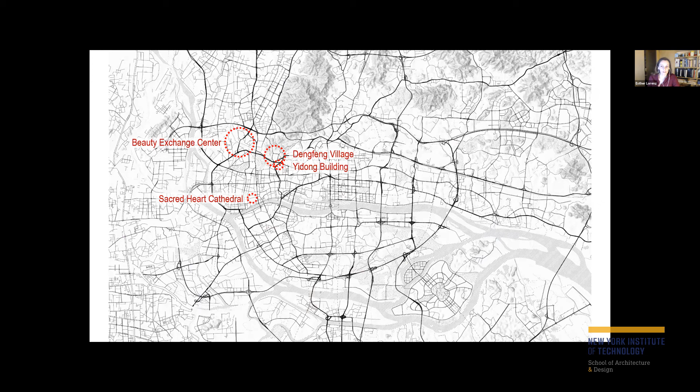A trader may spend an afternoon in Guangyuan West Road, then move to Yidong Building, getting all the shipping going. After that, walk over to Xiaobei, have dinner and drinks, and on Sunday may visit the Mass at Sacred Heart Cathedral. Each of the sites is a microcosm on its own, but they are all connected, together forming what we may consider an emerging Chinese cosmopolitan city.

So following that, we'd really like to present 2 discussion points. The first is a bit of a contextualization of China's multicultural history that started from the Silk Roads to 19th century treaty ports and to the closing of China, and then China and the era of globalization.

And that includes 149 years of the Xianbei people, 97 years of Mongols, 268 years of Manchus.

And the second point is about what is it that we can actually use to characterize a Chinese cosmopolitanism, in the sense maybe we can kind of temporarily put up this kind of contrasting conceptions of what cosmopolitanism is made of.

In the Western tradition, the European and American conception of cosmopolitan city is perhaps derived from the idea of the public. This is really an ancient idea, and Aristotle in Politics already discussed the fundamental difference between a large family and a small state, in the sense that a large family is a place where hierarchy dominates, and a small state is a place where a public becomes possible, and therefore justice, truth, and institutions. So that city tends to go for a kind of stratification domination model, based on intra-peer equality and inter-peer domination. Urban developments tend to follow patterns of stratification based on wealth, culture, and race, and cosmopolitanism is characterized by ideals of equality alongside systematic or systemic exploitation.